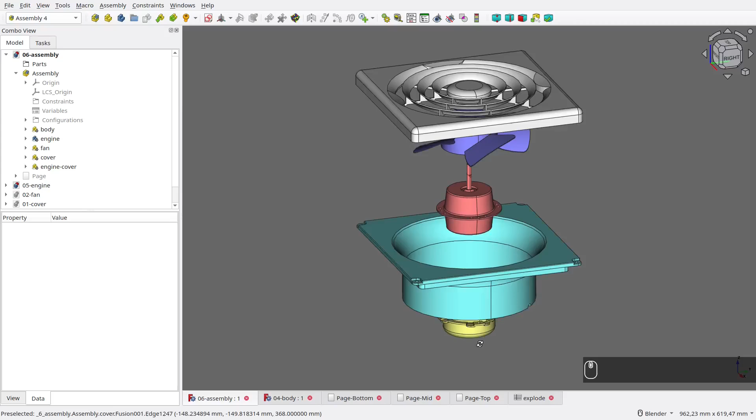In this video we are going to draw the biggest part of this exhaust fan, which is its main body. The shape is pretty simple except for several details on its grills.

As usual, let's start with a new document. Switch to Part Design Workbench, then create a new body. Here I name it Bottom. Since we are going to draw the bottom grills first, create a new sketch, then choose XY plane. Activate the Circle tool, then create two circles like this.

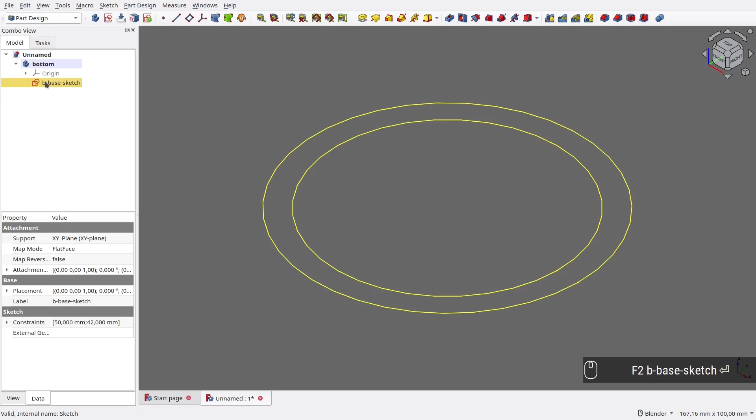Set the outer radius to 50 millimeters. Then, set the inner circle radius to 42 millimeters. Now it's fully constrained and the sketch for the body's base is finished. With the sketch selected, activate the Pad tool. Here I keep the pad length at 10 millimeters.

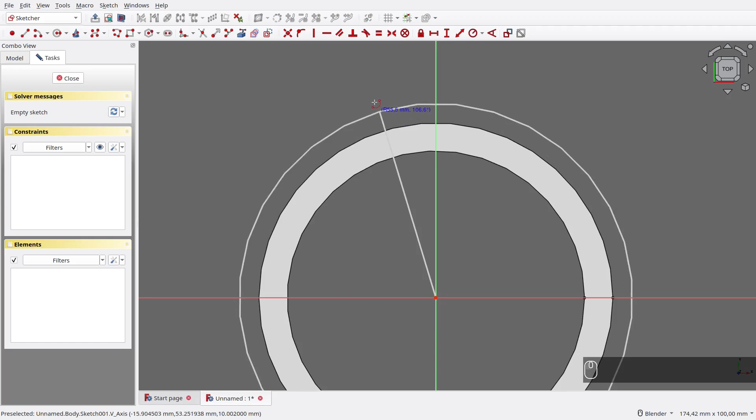The next step is to create the motor holder. Select the top face, then create a new sketch. Move a bit, then create an arc with center at origin. Set its radius to 55 millimeters. Create external geometry to the outer circle, then create two arcs that touch the edges.

Make every arc tangent with each other. Mark the right and left arc as equal. Next, create a horizontal line that connects both vertices. Set the side arc radius to 8 millimeters. Then set the horizontal line length to 46 millimeters. Now the sketch for the holder is fully constrained.

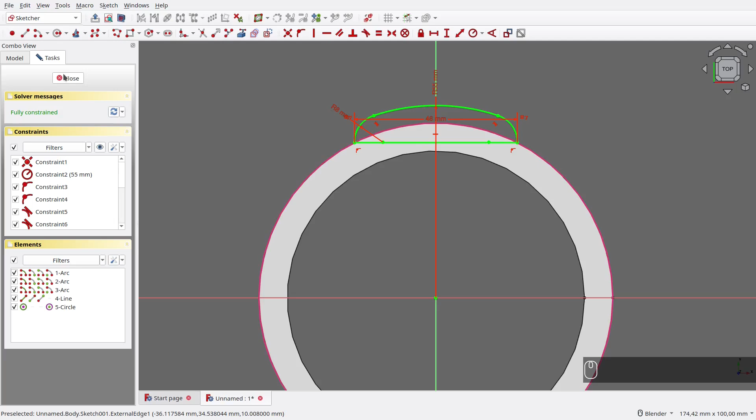With the sketch selected, activate the Pad tool. We need to reverse it so it pads in the correct direction. Make sure to refine it to dissolve the unneeded edges.

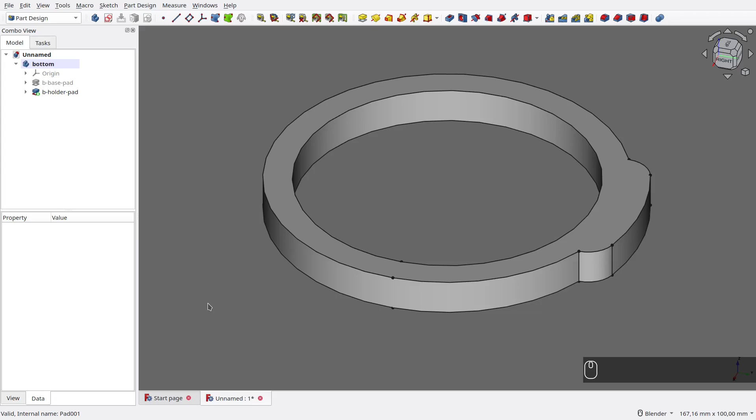The next step is to bore the motor holder. Select the top face, then create a new sketch. Create a circle with center on origin. Set its radius to 49 millimeters. Next, convert it into a guide. Let's zoom to the holder.

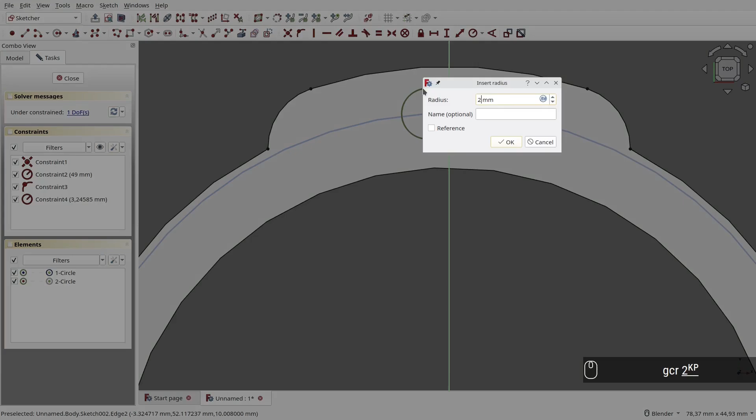Create a new circle with center on the guide's edge. Set its radius to 2 millimeters. Then constrain it to Y-axis. Next, use the Slot tool to create a capsule shape with center on the guide's edge. Set its radius to 2.5 millimeters. Set the capsule distance to 5 millimeters.

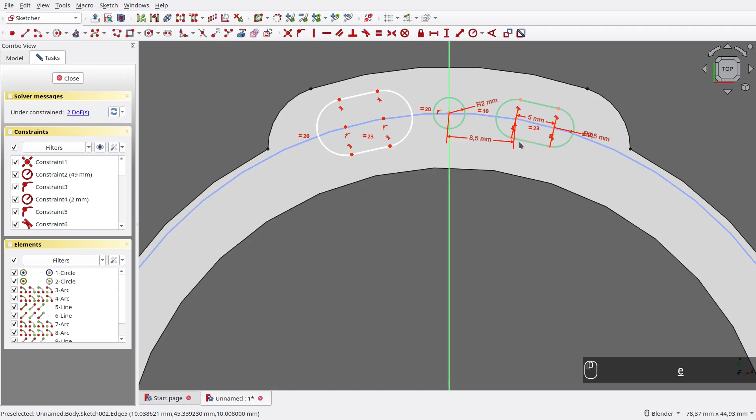Then set the distance between the capsule's arc and Y-axis to 8.5 millimeters. Create another capsule on the left side. Make its line distance equal with the previous capsule. Then do the same for its arc radius. Make both arc centers symmetric against Y-axis. Finally, remove the redundant constraint. Now the bore sketch is fully constrained.

With the sketch selected, activate the Pocket tool. Set its type to Through All. Now the holder's bore is finished.

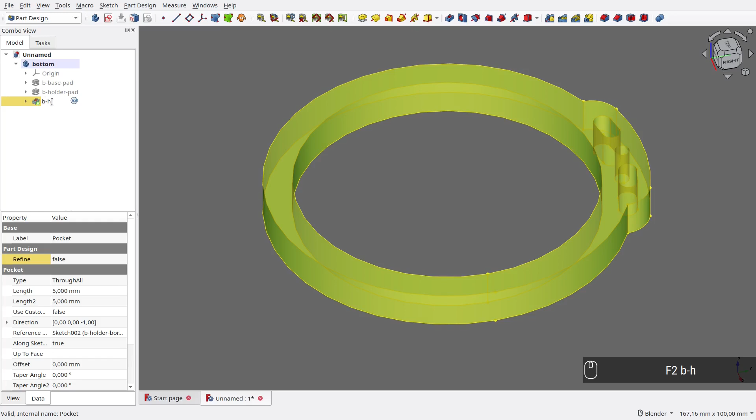Next, we are going to make pockets around the bore. Select the top face, then create a new sketch. Create external geometries to the bore arcs. Then, draw a capsule within those arcs. Set its radius to 4 millimeters. Then make the arc in the other capsule equal. Now the sketch for the pocket is fully constrained.

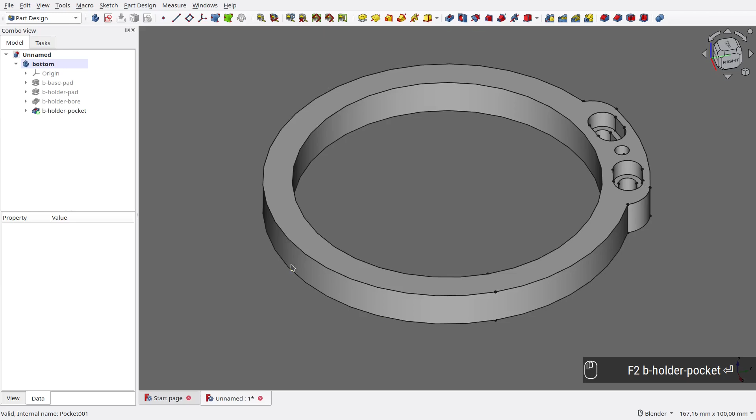With the sketch selected, activate the Pocket tool. Set its length to 5 millimeters. Now the pocket is finished. At this point, the holder shape is finished. We just need to clone it so it surrounds the center.

Select the holder pad up to the holder pocket. Make sure to select the pad first, to make sure the clones are created correctly. Select the Polar Pattern tool. Set the occurrences to 4, then OK. Make sure to refine it to dissolve the unneeded edges. Now the holders are finished.

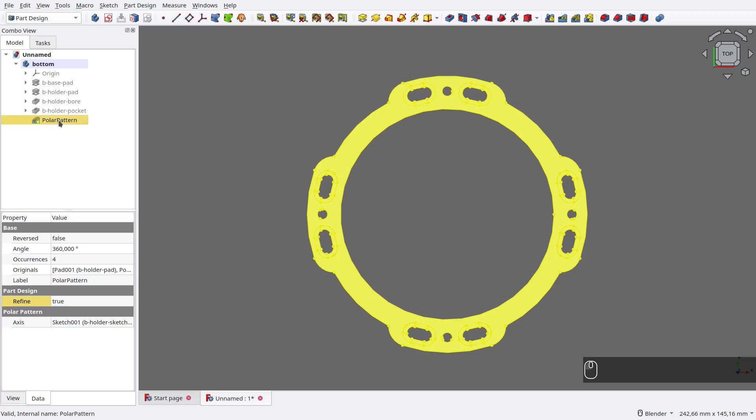Our next step is to create the small ribs for the bottom grills. Unselect all objects. Then create a new sketch. Choose XY plane. Create a rectangle like this. Make the bottom edge symmetric against Y-axis. Remove the redundant constraint. Set the rectangle width to 2 millimeters.

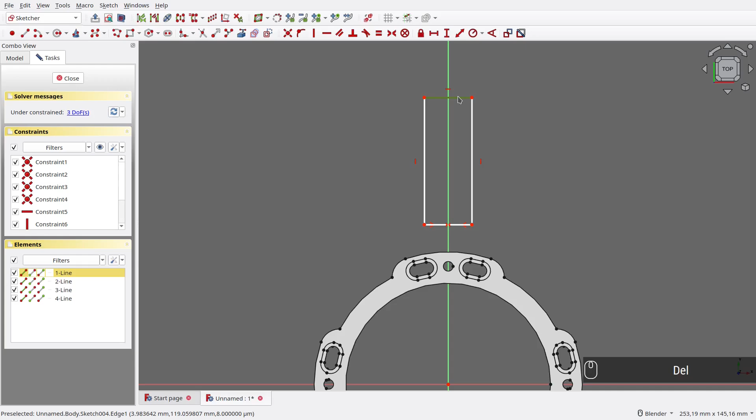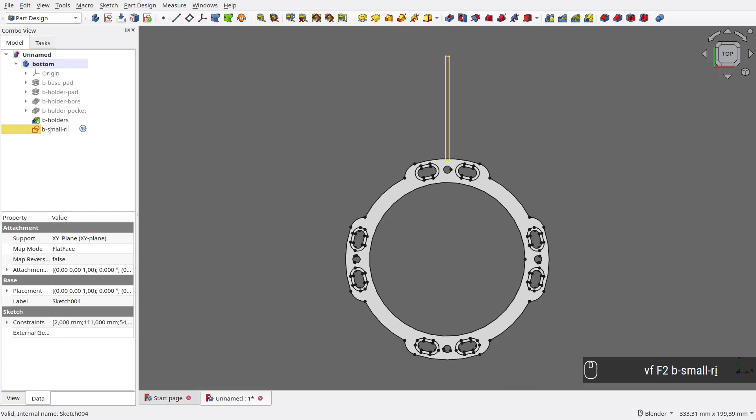Set the distance between the top edge and the origin to 111 millimeters. Then set the distance between the bottom edge and the origin to 54 millimeters. Now our small ribs sketch is finished. With the sketch selected, activate the Pad tool. Here I keep the pad length at 10 millimeters.

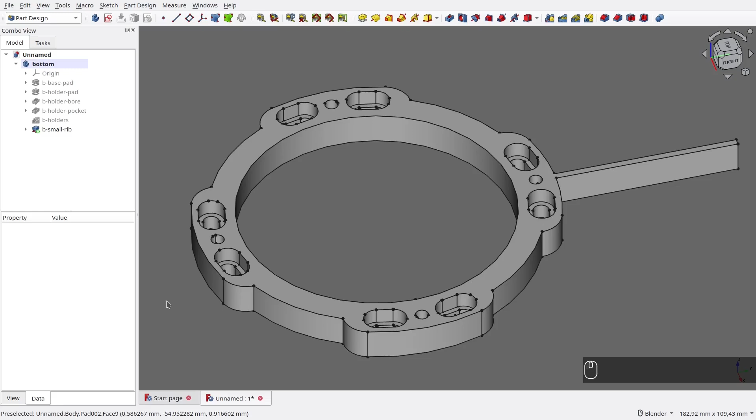Don't forget to refine it to dissolve the unneeded edges. With that done, our small rib is finished. Now we need to clone it. Select the small rib, then use the Polar Pattern tool. Set its occurrences to 4, then OK. Now the small ribs are finished. Let's refine it again to dissolve the edges.

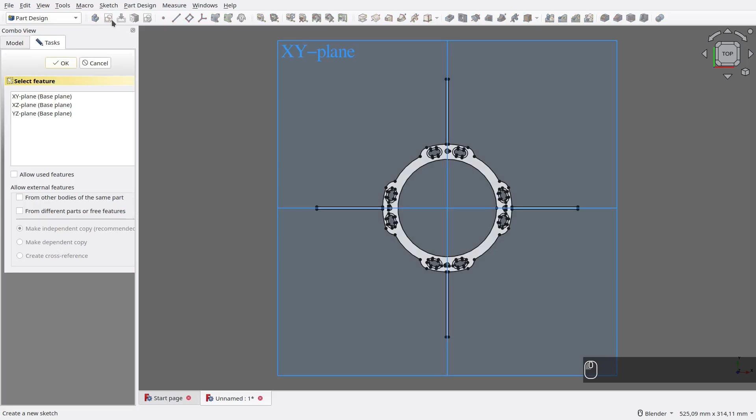Unselect the ribs, then let's draw the grills. Create a new sketch in XY plane. Let's make the first grill. Draw 2 circles like this.

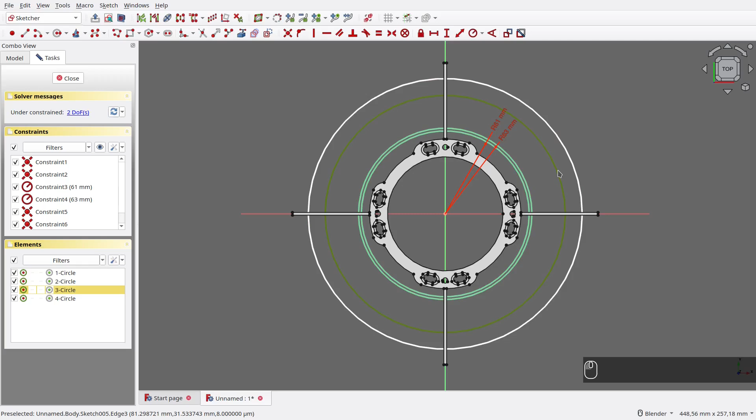Set the smaller radius to 61 millimeters. Then set the other one to 63 millimeters. Let's continue with the second grill. Draw 2 circles again. Set the smaller radius to 73 millimeters. Then set the other one to 75 millimeters.

Next is the third grill. Like before, draw 2 circles again. Set the smaller radius to 85 millimeters. Then set the other one to 87 millimeters.

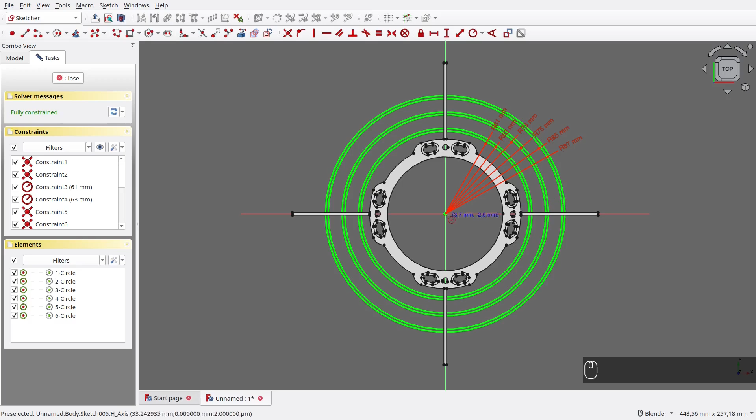Now, to the last grill. Like before, draw 2 circles like this. Set the smaller radius to 97 millimeters. Then set the other one to 99 millimeters. Now the grill's sketch is finished.

With the sketch selected, activate the pad tool. Like before, here I keep the pad length at 10 millimeters. With that, the grills are finished. Like usual, refine it to dissolve the edges. At this point, the grill is finished, so let's save our project.

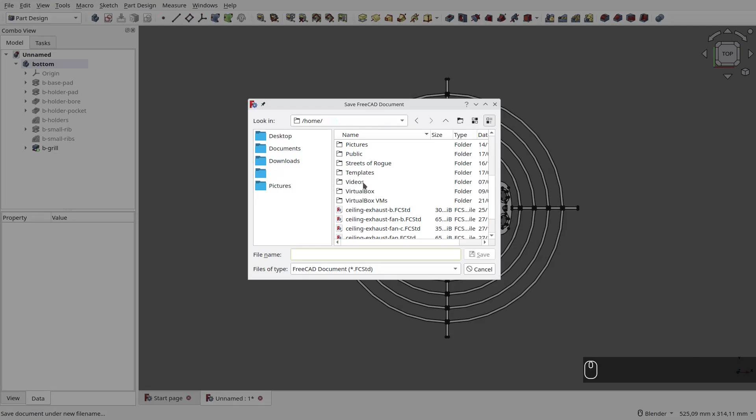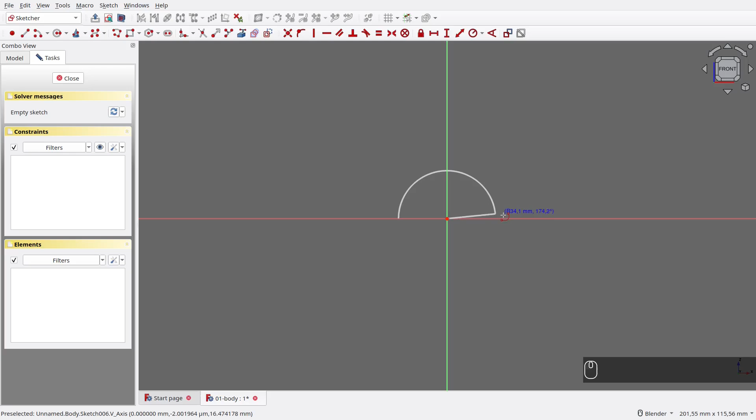Next, we are going to draw the big ribs. Switch to the front view, then hide the grills we already made. Unselect everything, then create a new sketch in XZ plane. Draw an arc with both vertices in X-axis. Then create a line that connects both of them. Remove the redundant constraint. Set the width to 15 millimeters. Now the big ribs sketch is finished.

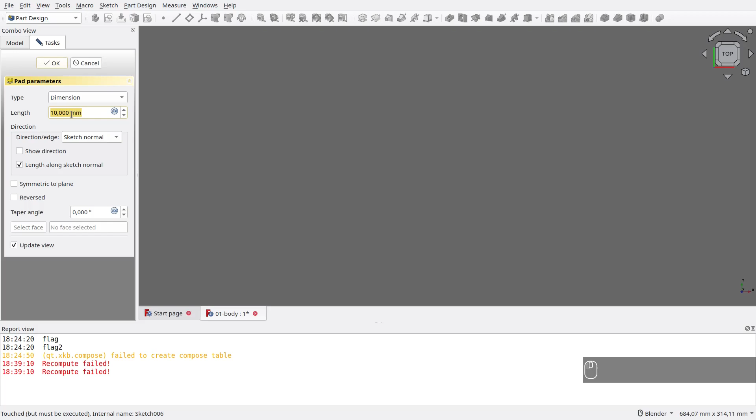Switch back to the top view. Select the sketch, then click Map Mode. Rotate it for 45 degrees around Y-axis. With the sketch selected, click Pad Tool. At this point, there is an error because there are multiple solids in one part. Just ignore it and set the pad length to 111 millimeters.

As you can see, now there is only one solid, so the pad is a success. Let's close the error message, then OK. Now our first big rib is finished. Like usual, refine it to dissolve the edges.

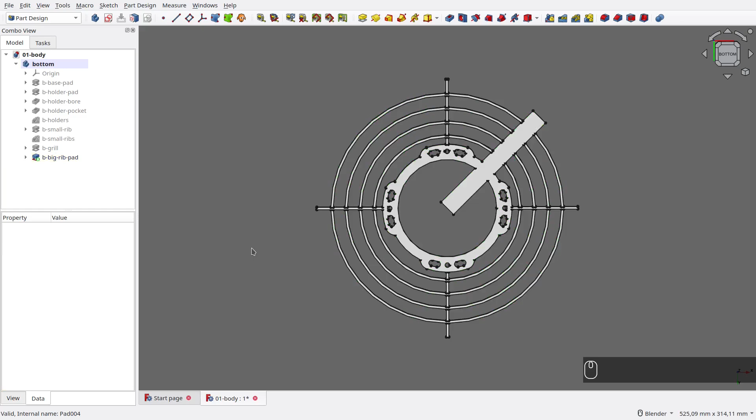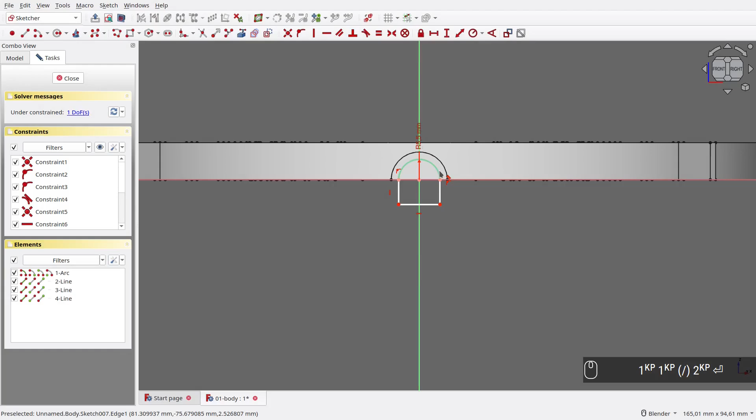Next, we are going to create a pocket in the big rib. Zoom to the rib's end. Select its face, then create a new sketch. Like before, create an arc with vertices touching X-axis. Use Polyline tool to close the shape. Set the arc radius to 11 divided by 2. Here I set the vertical line to 2 millimeters. Now the sketch for rib pocket is fully constrained, so we can close it.

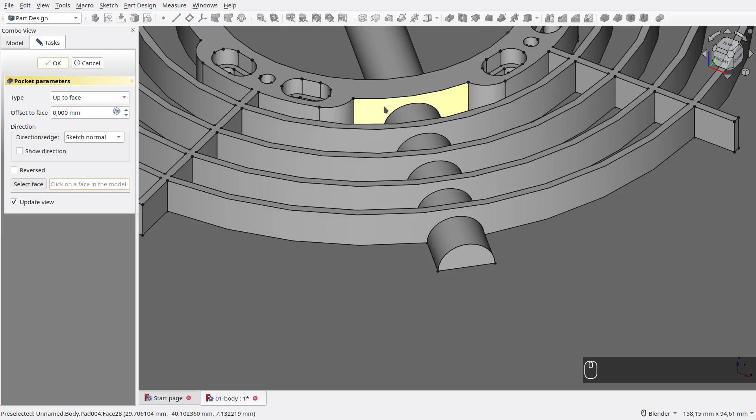With the sketch selected, click Pocket tool. Set its type to up to face. Then click the face in the center. Now the pocket succeeded, but for some reason the pocket ended on top. To fix it, just reverse the pocket direction. Now the pocket is finished.

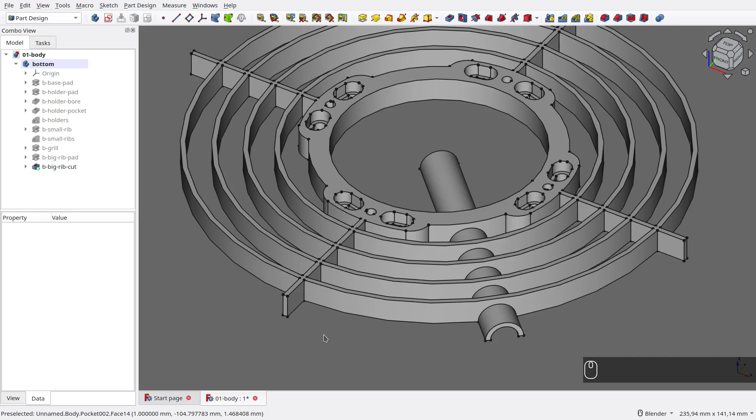At this point, the shape for big rib is finished, so we just need to clone it. Select the pad, then the pocket. Select Polar Pattern tool. Set its axis to vertical sketch axis. Set the occurrences to 4, then OK. Make sure to refine it to dissolve the unneeded edges. Now the big ribs are finished.

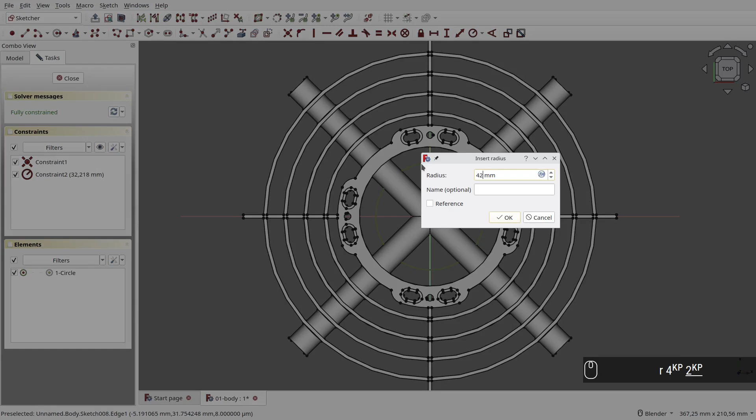Next, we need to clean up the center hole. Create a new sketch, then choose XY plane. Create a circle with center on origin. Set its radius to 42 millimeters. Now the sketch is fully constrained, so we can close it.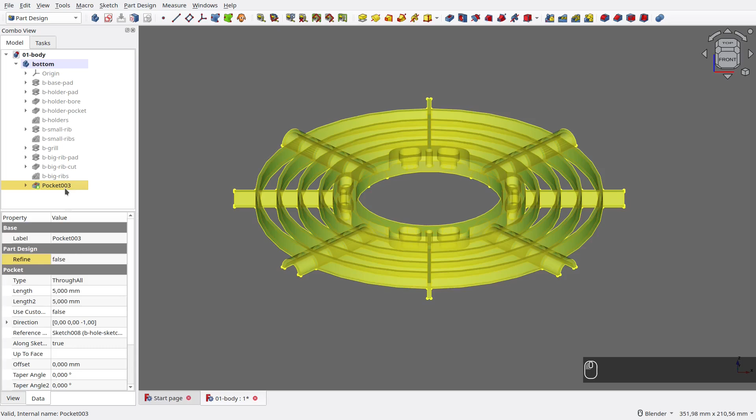With the sketch active, select Pocket tool. Set its type to Through All. Then, reverse its direction. Now the hole has been cleaned. Like before, we need to refine it. At this point, the bottom area is finished.

Next, we are going to move on to the middle area. Let's switch to Front View. Toggle the active body, then hide the bottom part we created before. Create a new body for the middle part. Create a new sketch, then choose XZ plane. Activate Polyline tool, then draw a shape like this.

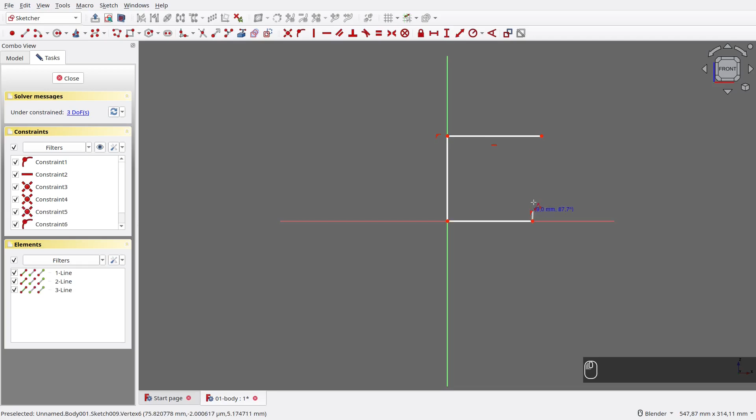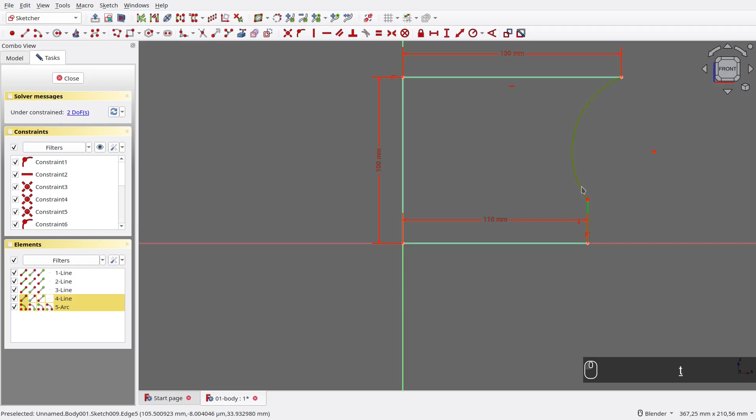Set the top edge's width to 130 millimeters. Set its height to 100 millimeters. Next, set the bottom edge's width to 110 millimeters. Now draw an arc like this. Make it tangent with its neighbor. Set its radius to 50 millimeters. Now the sketch for the base is fully constrained. Activate the Revolve tool, then OK.

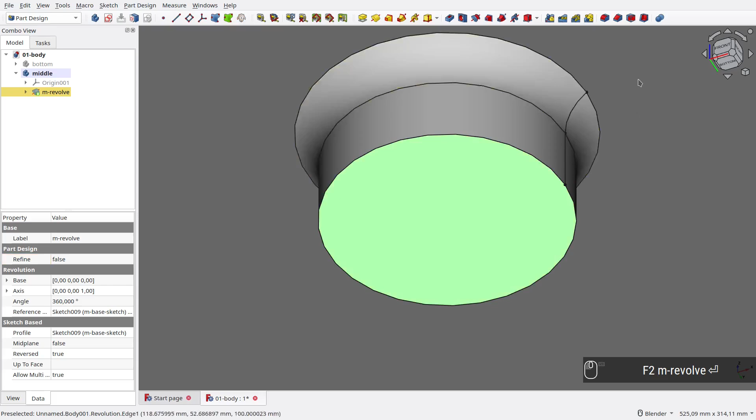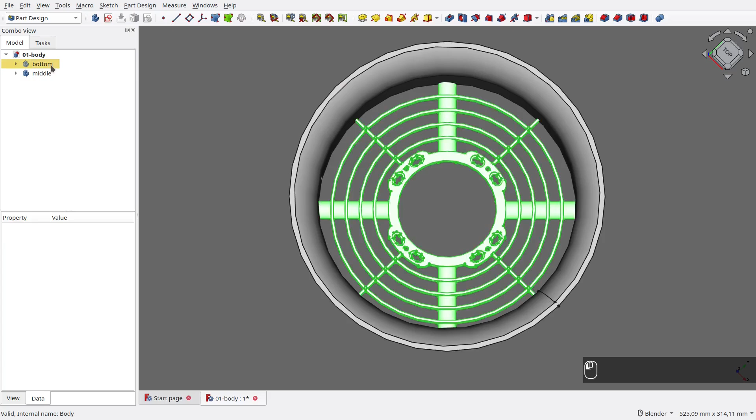Now we just need to create its shell. Select the top face, then select the bottom face. Click Thickness tool. Set its thickness to 2.5 millimeters. Now the middle part is finished. Here is how it looks together with the bottom part. Next, we are going to draw the top part. Toggle the active body. Then hide all parts we've created before. Create a new body to contain the top part.

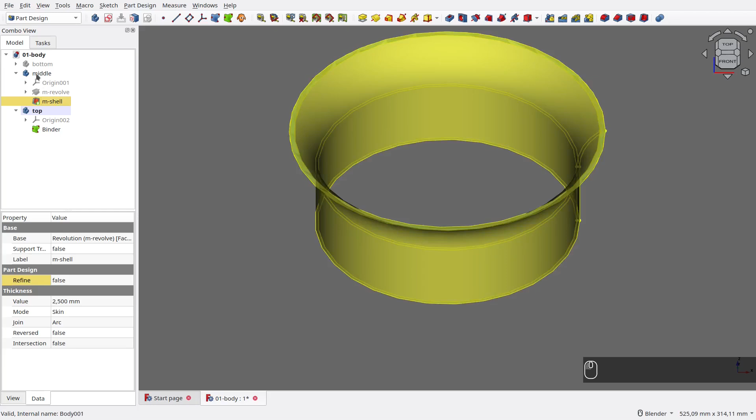We want our top part to be above the middle part. So, let's show the middle part again. Select its top face, then click Shape Binder tool. Now we can hide the middle part again, so it's easier to draw. Now we can start drawing using this binder as the base.

Select the binder face, then create a new sketch. Use Centered Rectangle tool. Then, draw a square with center on origin. Make the left and bottom edge equal. Set its width to 300 millimeters. Now the sketch for top base is finished.

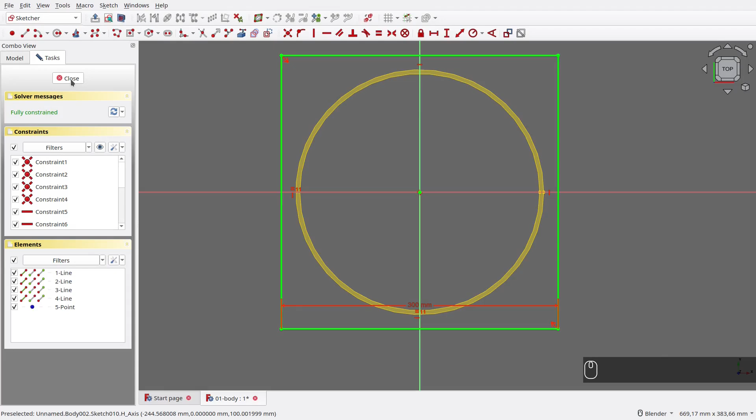With the sketch selected, click Pad tool. Set its length to 7 millimeters. Then reverse its direction so the binders stay on top. Now the base is finished. Next, we are going to fillet its corners. Select each corner. After that, activate Fillet tool. Set its radius to 8 millimeters, then OK.

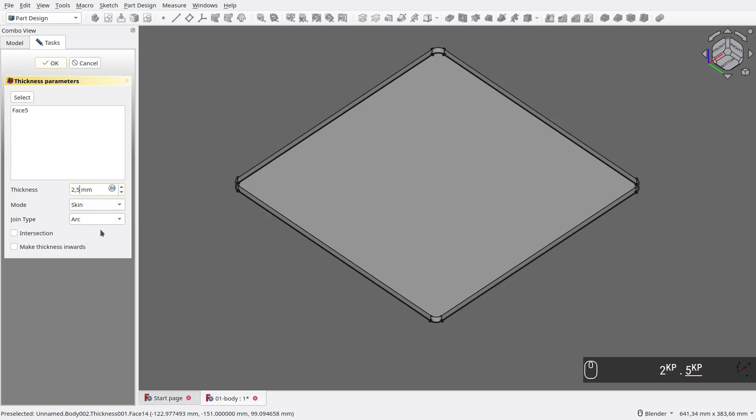Next, we are going to make the shell. Select the bottom face, then click Thickness tool. Set its thickness to 2.5 millimeters, then make it grow inside. Now the shell is finished.

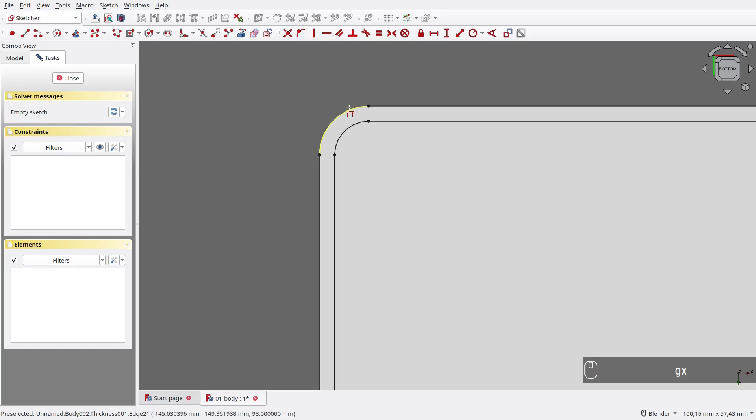Next, we are going to draw the corner support. Switch to Bottom View. Select the bottom face. Then create a new sketch. Let's zoom to one of the corners. Create external geometries to the outer edges. Here I hide the previous shell so it's easier to sketch. Activate Polyline tool, then draw a shape like this.

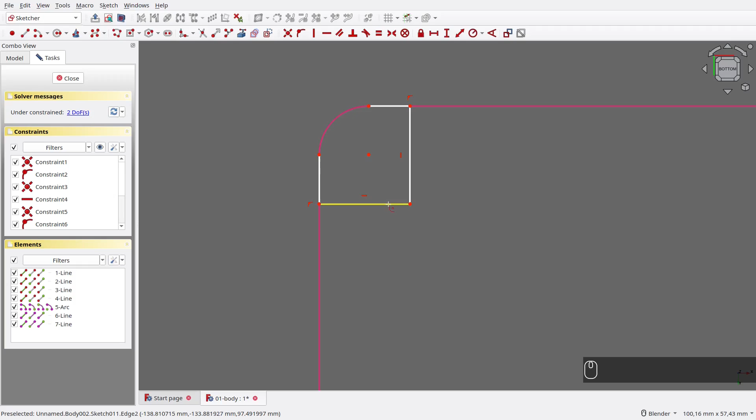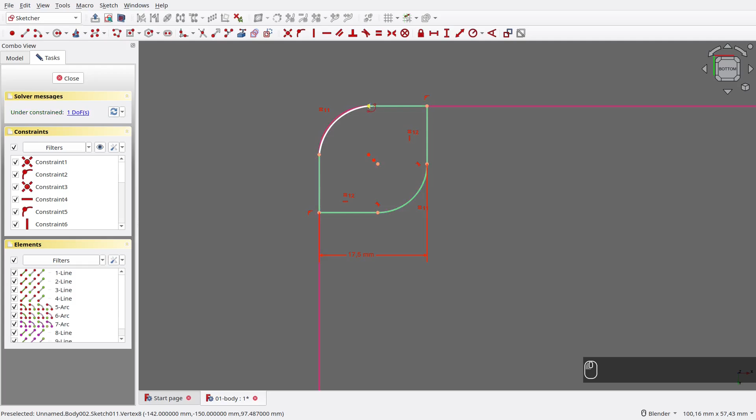Remove the redundant constraints. Create a fillet in bottom right. Make its radius equal with the external arc. Make the bottom and right edge equal. Select vertex in the left and in the right edge. Set its width to 17.5 millimeters. Finally, draw an arc in the place of the external arc. Now the sketch for corner support is finished.

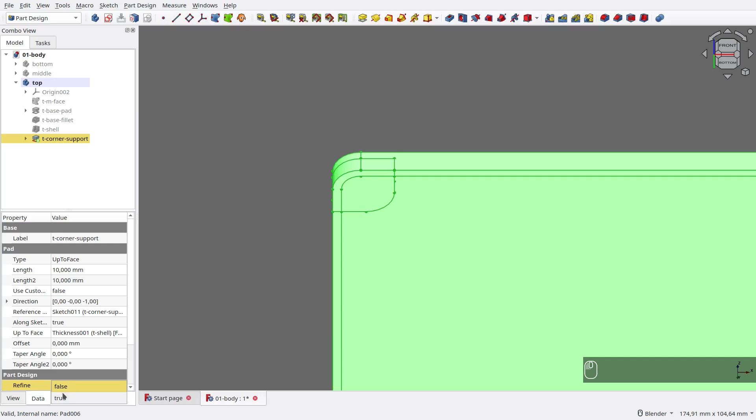Activate the Pad tool. Set its type to Up to Face. Here I choose the bottom face. Now the corner support is finished. Make sure to refine it to dissolve the edges.

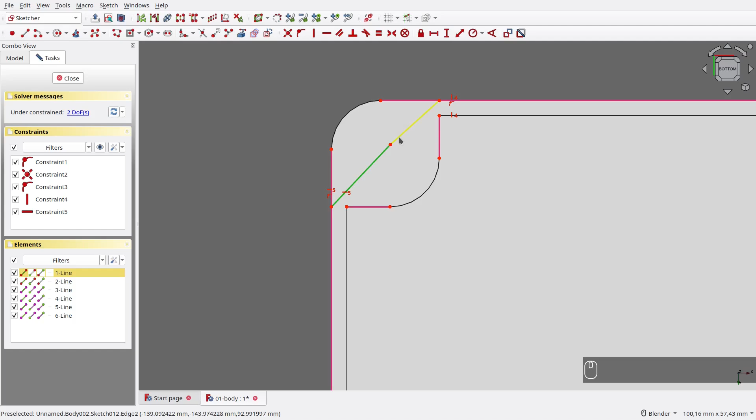Now we are going to bore the corner. Select the bottom face, then create a new sketch. Let's move to the corner. Create external geometries for several edges. With Polyline tool, draw two lines like this. Align these two vertices vertically. Then, align these two horizontally. Make both lines equal, then make them parallel.

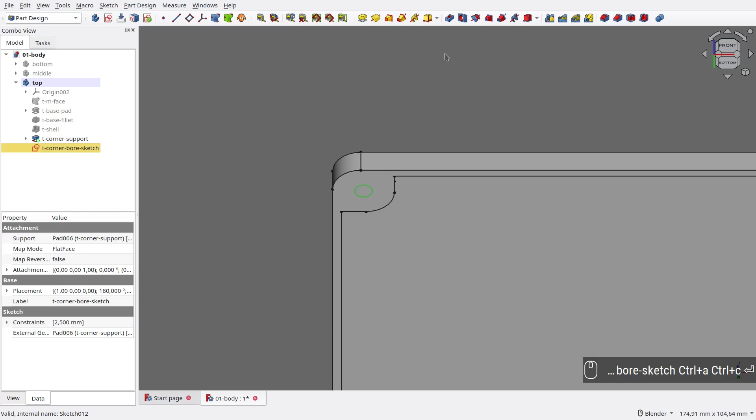Convert those lines to guide, and now we got the center. Now draw a circle in that center. Set its radius to 2.5 millimeters. Now the bore sketch is finished. Activate the Pocket tool, then set its type to Through All. Now the corner's bore is finished.

Next, we are going to draw the corner pocket. Switch to Top View. Select the top face, then create a new sketch. Let's focus on the corner. Here, we are going to look at the bottom. Create several external geometries from corner support. Now move back to the top view. Draw a rectangle like this.

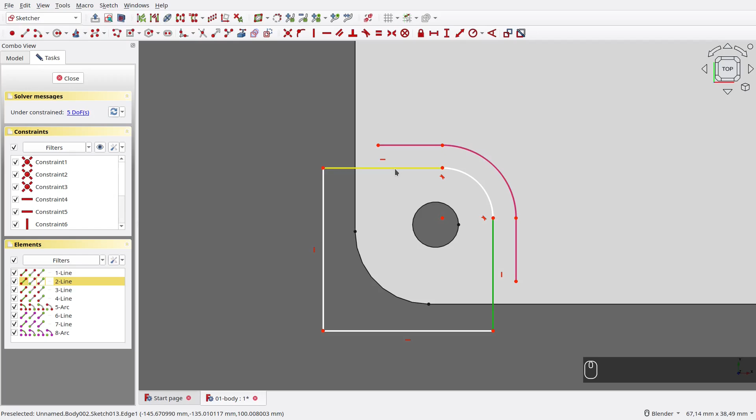Create a fillet in the top right corner. Make the right and top line equal size. Set the distance between external right and the edge to 2.5 millimeters. Do the same for the top side. Set its width to 20 millimeters. Then align the arc vertex against the external arc horizontally. Now the pocket sketch is fully constrained, so we can close it.

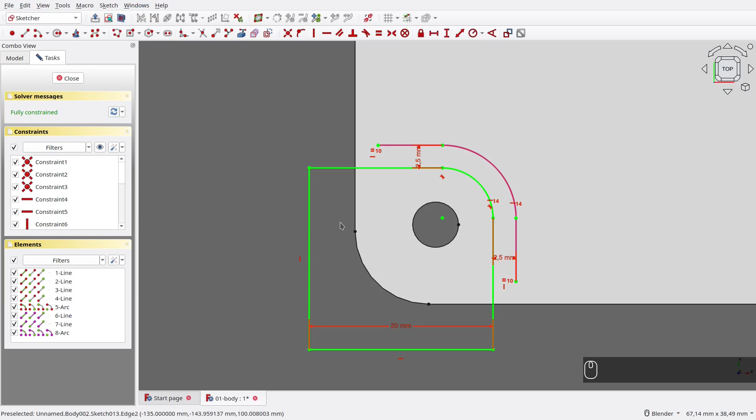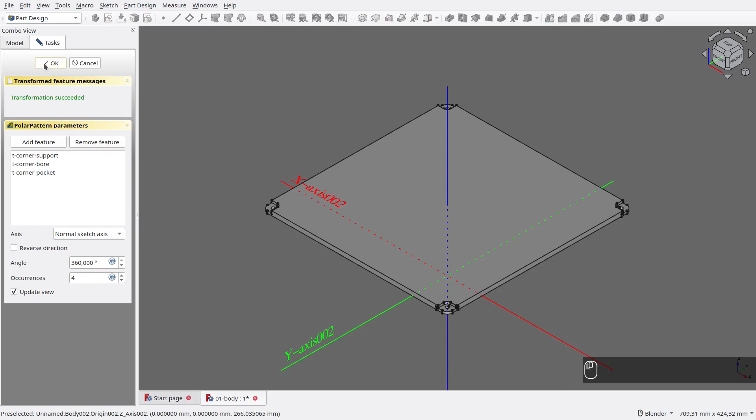Here is how it looks from the side. Now click the Pocket tool, then set its length to 3.5 millimeters. Now the corner shape is finished, and we just need to clone it. Select from Corner Support up to the pocket. Then click Polar Pattern tool, set its occurrences to 4. Once done, click OK. Now the corners are finished. Like usual, refine it to clean up the edges.

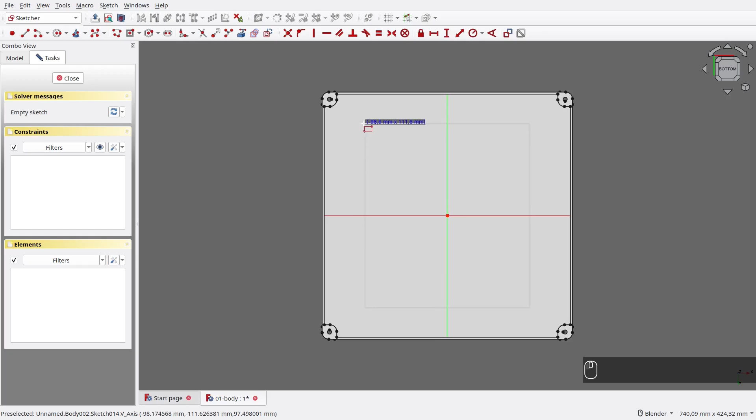Next, we are going to draw the bottom support. Let's move to the bottom. Select the bottom face, then create a new sketch. Draw a rectangle with center on origin. Use Fillet tool to fillet each of its corners. Next, make every arc equal size. Make the bottom left arc and top right arc symmetric against origin.

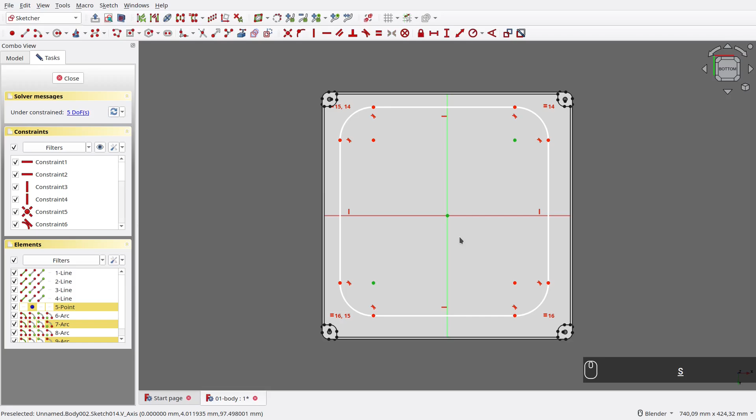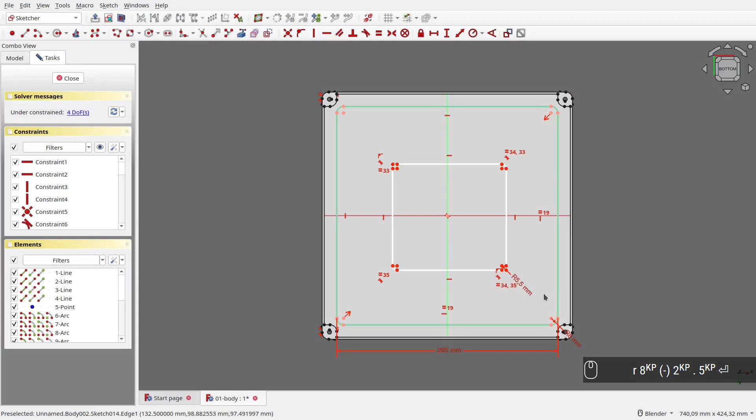Set the arc radius to 8 millimeters. Make the bottom edge and the right edge equal. Then set its width to 265 millimeters. Next, we'll draw the inner rectangle. Click Rounded Rectangle tool. Then draw it like this. Set its arc radius to 8 minus 2.5 millimeters. Make the bottom and right edge equal. Set its width to 260 millimeters.

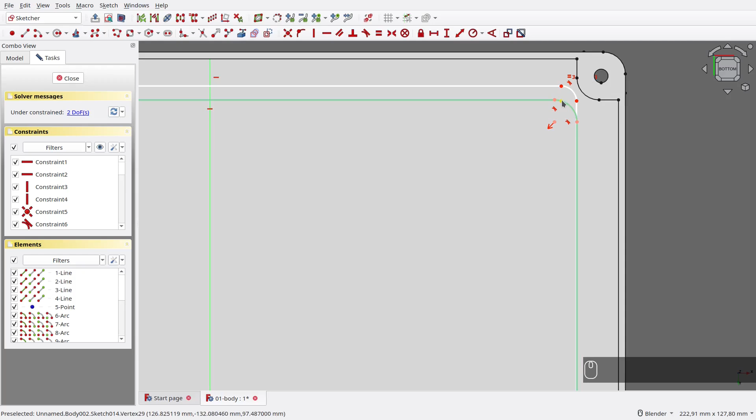Now we just need to put it in center. Select the bottom left arc center. Then select the top right arc center. Make them symmetric against origin.

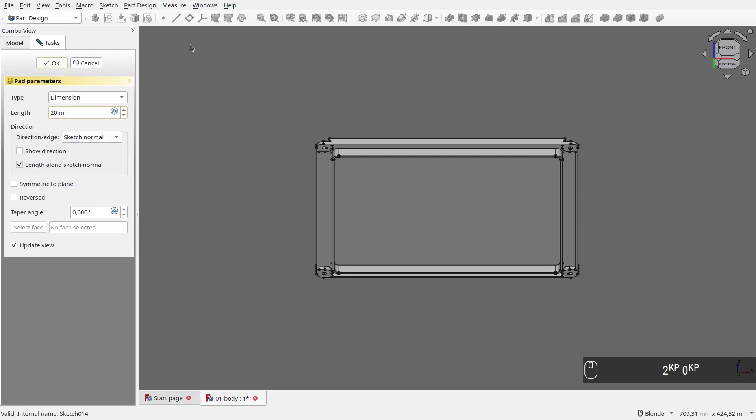Now the sketch for bottom support is finished. Let's close the Sketch tool. Now move to the front view. With Sketch selected, click Pad tool. Set its length to 20 millimeters. Now the bottom support is finished.

Next, we are going to make the edge support. Select the bottom face, then create a new sketch. Let's zoom to the top side. Create external geometry for the inner edges. Let's hide the solid so we can draw the sketch easily. Draw a rectangle like this.

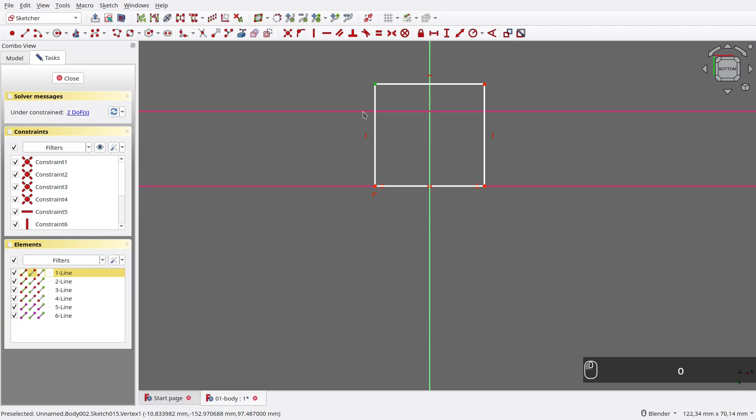Then, make its bottom edge symmetric against the y-axis. Remove the redundant constraint. Constrain the bottom edge to the external geometry. Then, do the same for the top edge. Set its width to 2.5 millimeters. Now the sketch for edge support is finished.

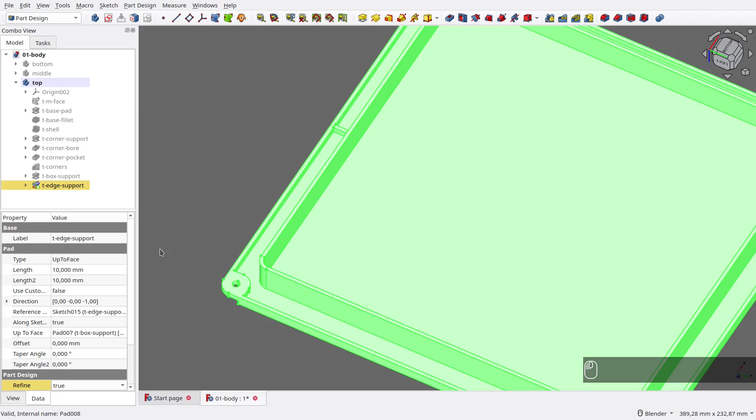With the sketch selected, click Pad Tool. Here, I set its type to Up to Face. Like usual, let's refine the pad result. Now, we just need to clone it. Select the Edge Support pad. Then, select the Polar Pattern tool, then set the occurrences to 4. Now all supports are done. Like usual, don't forget to refine the result.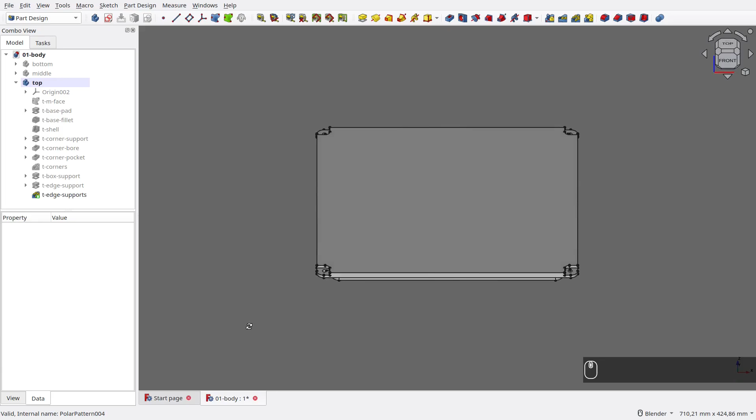Next, we are going to fillet several edges. By the way, fillet in FreeCAD is a bit finicky, so make sure to save before doing it. Select the top face, then click Fillet tool. Here, I set its radius to 1 millimeter. Click Select, then select all edges around the corner pockets.

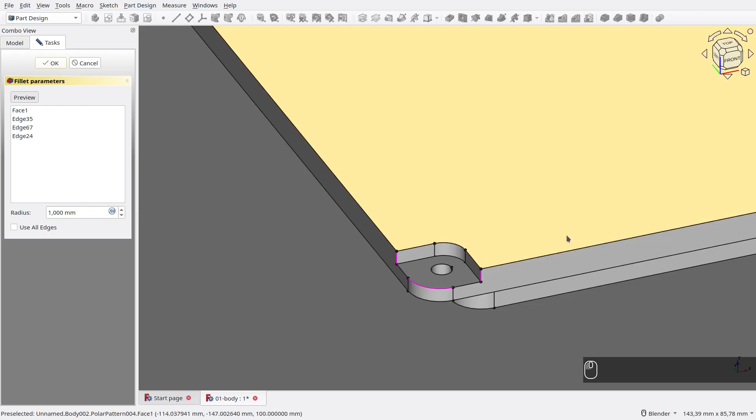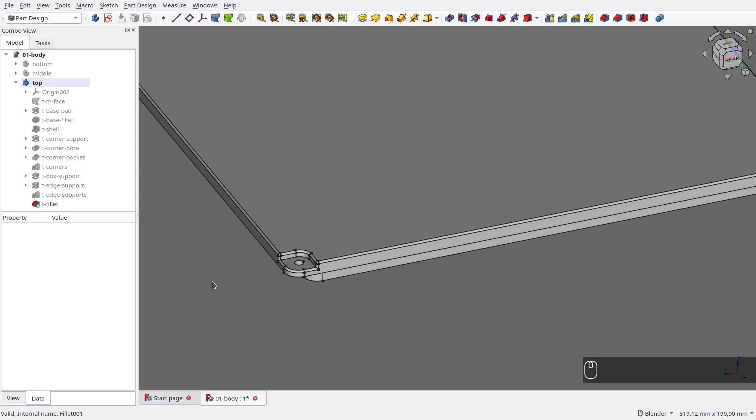Once done, go back to preview mode. If there are no problems, click OK. Now, the fillet is finished. Our next step is to create a hole for the top part. Let's show the base sketch for the middle part. Select the sketch, then create the shape binder. Let's hide the middle part again.

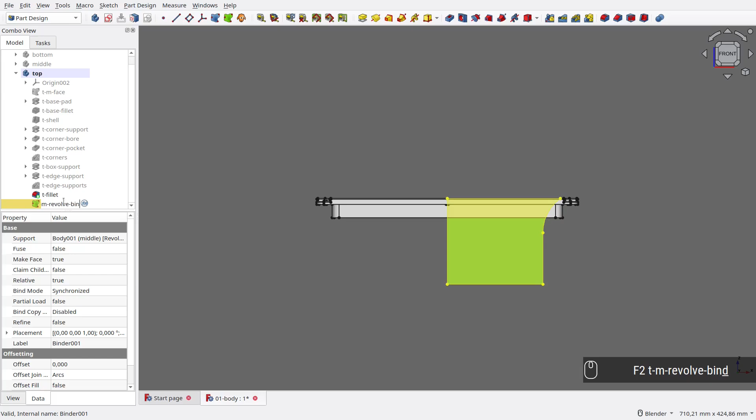Here I rename the binder for clarity. With the binder selected, click Groove tool. Set its axis to Z axis, then OK. Now the hole is created. At this point, the top part is finished. Here is how the entire top part looks.

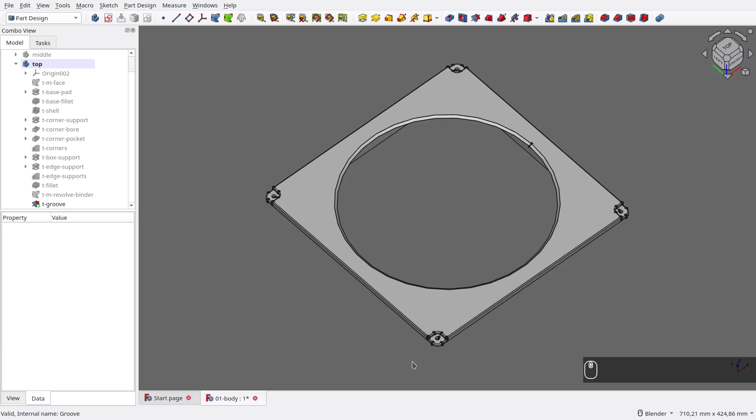Our next step is to merge every part into one body. Let's show back the previously created parts. Then, toggle the active body. Switch to the Part workbench. Select all parts, then click Fuse tool. Refine the fusion result to dissolve the edges. Now the main body has been merged.

Next, we are going to create the cable hole for the motor. The hole will be located in this big rib. It will cut through all, from the center grill to the outer shell. Switch to the Sketcher workbench. Move to the front view. Let's hide the main body. Then, create a new sketch. Sorry, let's cancel it. Make sure to unselect everything, then create a new sketch.

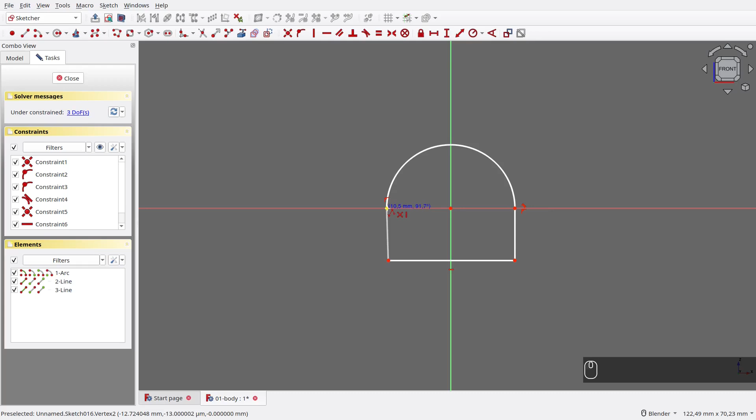Set its plane to XZ plane. Use Arc tool, then draw an arc with center in origin like this. Switch to Polyline tool to close the sketch. Set the arc radius to 11 divided by 2. I set the line height to 2 millimeters. Now the sketch is fully constrained, so close it. Let's move to the bottom view.

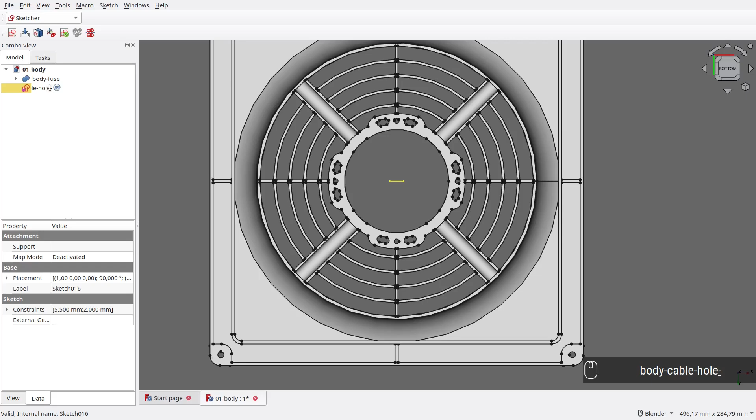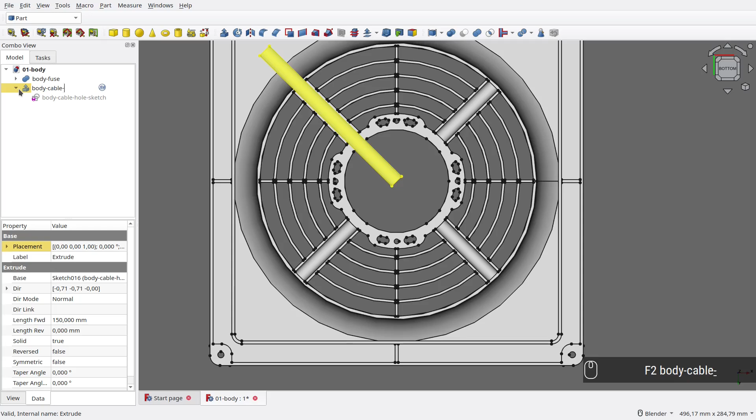Here, I rename to make the sketch's purpose clear. Select its placement. Set its yaw to -45 degrees. Switch to the Part workbench. Select the sketch, then click Extrude tool. Here I set its length to 150 millimeters, then OK. Let's rename it again. As you can see, the pad angle is correct, but the direction is wrong. So let's reverse its direction. At this point, the pad for cable hole is finished.

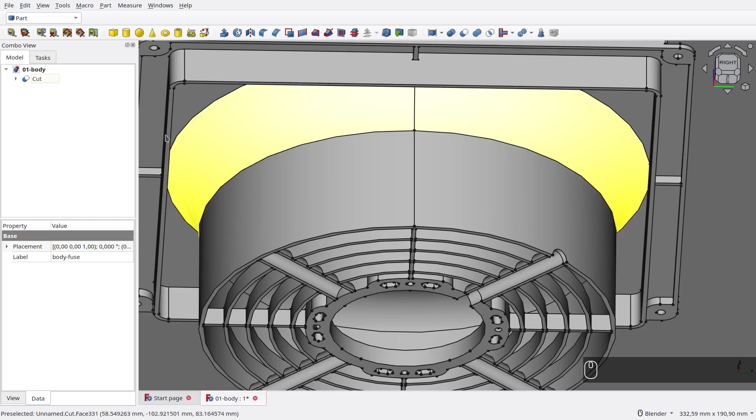Select the main body, then the cable hole pad. Then, click the Cut tool. Now the body is finished, complete with its cable hole. Like usual, don't forget to refine the cut result. At this point, our body is finished. However, as it is right now, it can't be used for assembly. We need to wrap it in something called an assembly part.

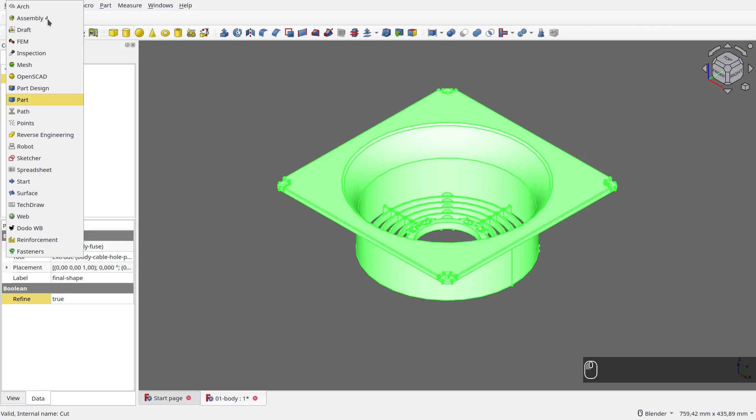Let's switch to the Assembly workbench. Then create a new part. Next, drag and move our body to the new assembly part. Now our body has its own local coordinate system and can be used for assembly.

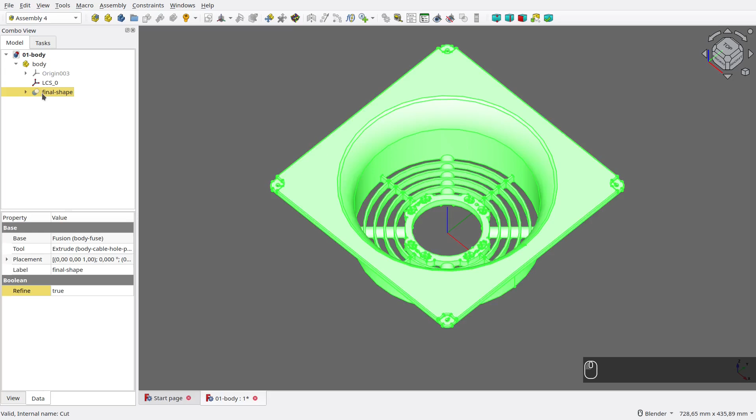The last step is to set the appearance of the body. Select the final shape. Then, press Ctrl-D to open Appearance Config. Here I set its color to a light blue. Next, I reduce its point size and line width to make it prettier. Now our first part for the ceiling exhaust fan is finished.